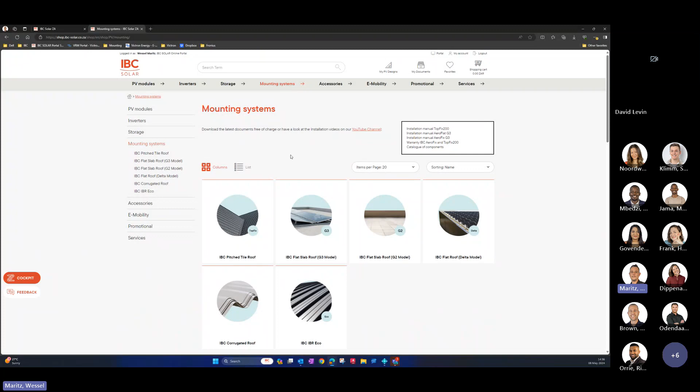So basically, once you log into the portal, you will be directed to the home page. If you go to the overview menu of the mounting systems and select it, it will display all the different types of mounting structures for the different types of roofs that we've got currently. In each separate category, everything is organized for what you need for that specific roof type.

So if we go into the tile roof section, for instance, it will show you all the various clamps that we've got, from the 30 mil up to the 35 mil clamps. We've also got our new end clamp range landing soon, which can go from 30 to 50 mil. Your G3 structure is the more premium range, if I can put it like that.

You will also see a new addition to our mounting structure range, the aluminium roof hooks that we introduced. This specific Mammoth SV Plus is for landscape orientation mounting on tile roofs, which I know you guys previously inquired about. On the second page you will find the stainless steel versions of these roof hooks.

Just want to go back to the corrugated to relate to what Alton said about the special we're running on this sheet adapter. Please note, if you use this sheet adapter, you would need the 120 mil Eco bracket that goes with it. This basically screws on top of that adapter. So with this, you can make a single layer or two-tier mounting structure on the corrugated roof.

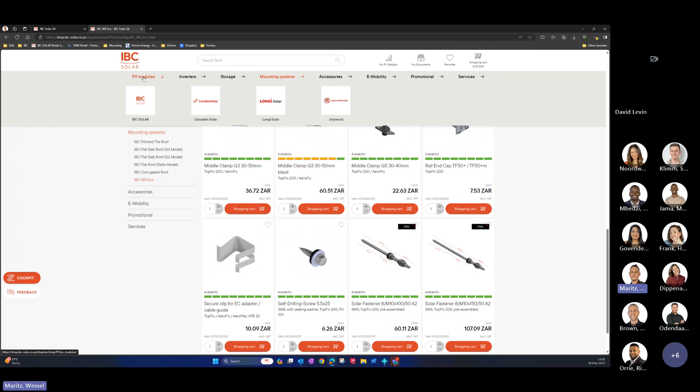Then just to head over to our panel side, we did recently also introduce Canadian Solar into our product portfolio. On your more premium black panels, that's exclusive to our IBC range. So on the Longi, Canadian, and Jollywood, we only do the silver frame modules. Black frames are only on our IBC modules.

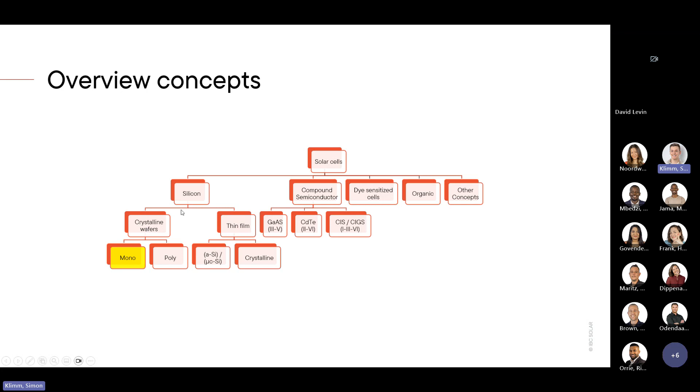What kind of manufacturers do we get? It doesn't matter which manufacturer it is, whether Jinko, Longi, or even manufacturers we have here in Germany, but mostly, more than 85%, are coming from China.

China is producing over 330 gigawatts, and there you can see they have a lot of force to keep the production of PV modules for all around the world. Longi is taking more than a quarter of all the manufacturing of PV modules. This was from 2021, but it's also up to date at the moment, so this hasn't changed a lot.

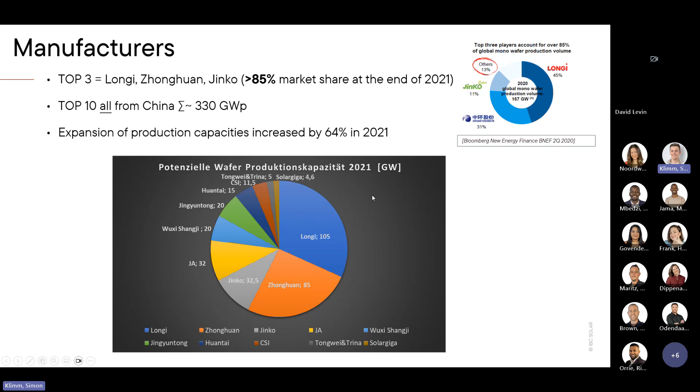This is getting a bit technical, but you don't have to remember every piece of information on this slide, just that you've seen or read it. We have 4 different types of cell concepts: the BSF type, the HJT type, the IBC type - which has nothing to do with IBC Solar, it's just called that - and the PERC type.

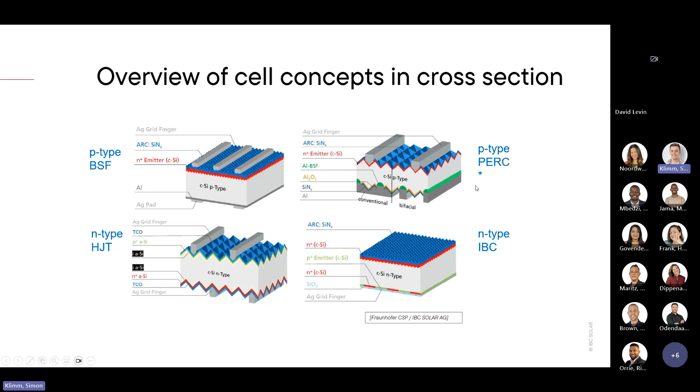PERC has been the most up-to-date concept until about 1 or 2 years ago, but what came after PERC is the TOPCon technology. The reason we use TOPCon is that it has increased efficiency, so it's now the new mainstream, as it's written here.

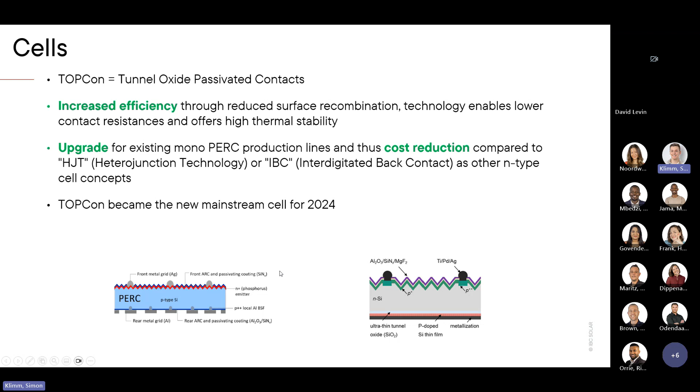With TOPCon you also get a cost reduction, but not to get too technical, just that you've heard it. Here at the bottom in the picture you can see the cross-section of a solar cell - less than 1 millimeter, really, really thin for a solar cell, and this has been the PERC type. But as I said, TOPCon technology is now up to date for most modules in the PV market.

What kind of layers does a PV module have? It's pretty nice to see. First, of course, you have the frame. As Wessel already said, it can be black or silver. IBC modules have, for example in South Africa, mostly black, but we also have silver variations, which here in Europe is also a bit cheaper, but as I said, it can be black or silver.

Then you have the glass. It's very important that the glass is as thin as possible, because you want all the sun energy coming through the glass and not going back. So this is really, really important.

After that, an encapsulant, and the main thing here are the solar cells - what I just showed you, with a cross section less than 1 millimeter, so really, really thin. On top of these solar cells you have the bus bars - you can always see these small silver stripes on solar cells, these are called the bus bars.

The solar cells are typically a full cell, but what is now already up to date, also in the IBC modules, is the half-cut technology. Half-cut means you just cut these cells in half and connect them with the bus bars. This has a reason: the efficiency of the modules is increased, and you get a few percent more efficiency from the PV module.

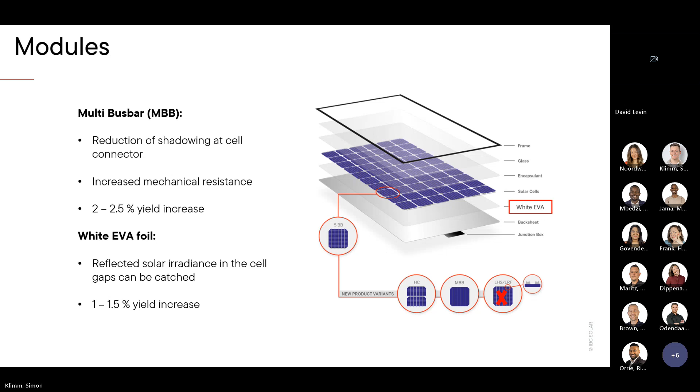This means the sun shining onto the module goes through all the layers, and if you have a white underground behind the module, the sun shines back onto the module and you get a bit more power, because you don't only have sun shining onto the top of the module, but also from the back. So this is the simple way to show how PV modules are manufactured and what the single layers of a PV module are.

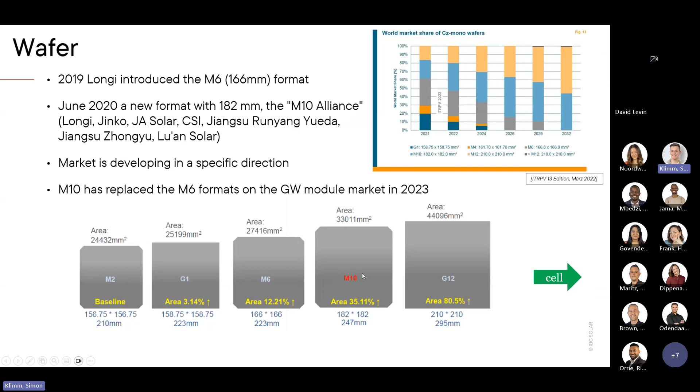The modules with the half-cut design have increased efficiency, and because if the modules bend, the whole solar cells could break. This is a big advantage you have with the half-cut technology. The modules bend and you don't lose efficiency because of the bending of the cells. So this is the most important advantage at this point.

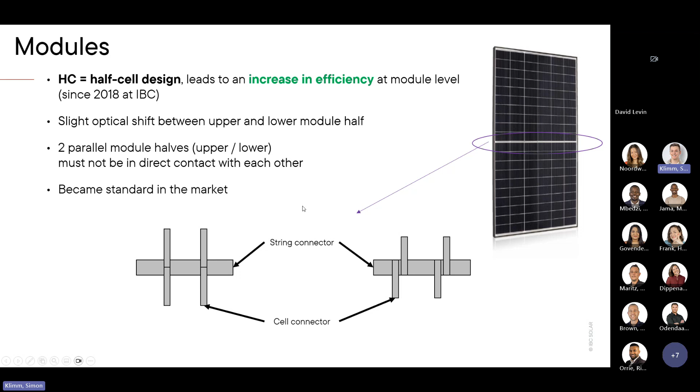If there's a shadow, the diodes switch so the current can flow through them. For example, with 3 diodes, the first 2 rows have 1 diode, the third and fourth row have 1 diode, and the fifth and sixth row have 1 diode. If there's shadowing in the sixth row, the diode gets activated and the current just flows through the first 4 rows, while that row gets skipped because the current flows over the diode. This protects the PV modules from further damage.

Coming to the half-cut design, you have 6 of these diodes located in the middle of the module - on the left you have an upper and lower part, in the middle you have 2 parts, and on the right side you have 2 parts, so 6 diodes total. If the shadowing is on the bottom right, only half the size would be skipped, and you get even more efficiency from the module. This is the big advantage you get from the half-cut design.

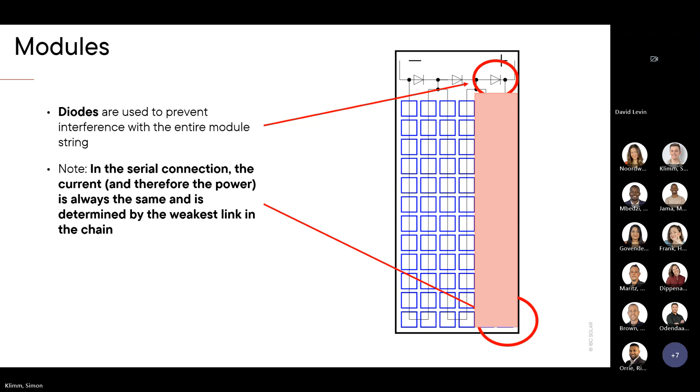These are also the design loads currently set for our PV modules, I think 1,600 pascals, meaning 1.6 kilonewtons per square meter. So you can see how these modules are tested and how these values aren't just calculated on paper - they're really tested practically, so we can say the PV modules have this quality and can withstand windstorms, snowstorms, and everything like that.

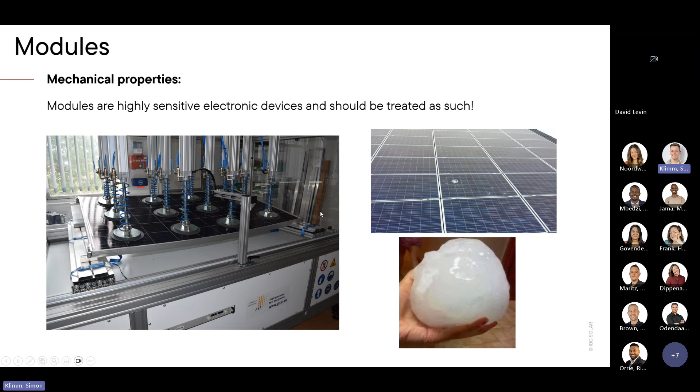What kind of variants can you get for modules, not just from IBC, but also from Longi or Canadian Solar? We have the standard white one with the white backsheet, we have the black ones with the black backsheet, and we have the bifacials. Bifacials have the glass in the front and also in the back, so you can increase the efficiency and get the energy from the back of the module when the sun is shining through it.

IBC Solar modules are around 400 to 420 watts. Canadian, Longi and Jolywood already have modules up to 550 watts, I think. This is because those modules have a higher surface area, over 2 square meters. Because of a regulation here in Germany, IBC Solar modules are not allowed to be over 2 square meters, so we can't use as many solar cells, and we only get 400 to 420 watts. In difference, Canadian Solar for example has modules over 2 square meters with more solar cells, so they get up to 550 watts.

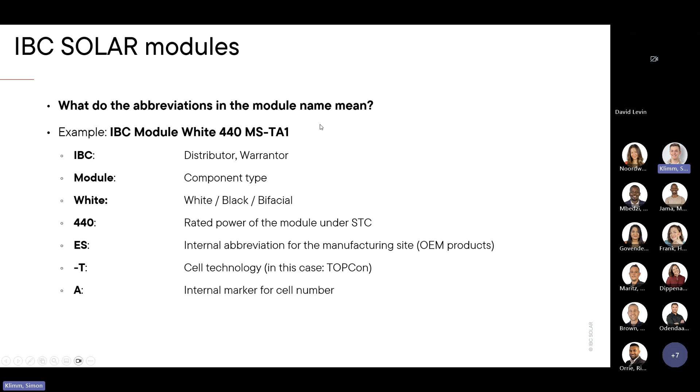What we also have is climate chambers, meaning the modules go in there, and for one hour you have, for example, minus 40 degrees, and in the next hour you have up to plus 70 or plus 80 degrees Celsius. So here the modules are also checked for climate differences.

And to confirm the rated power that you buy for the modules, for example a 440 watts module, this is tested here in a flasher, meaning there is a flashlight used for every module test all over the world, always the same flashlight. Then you can see, okay, the PV module gets a rated power of only 430 watts, or it gets the rated power of 440 watts. Then you can see the module is all right, it doesn't have damage, and you get the efficiency you also bought with your PV module.

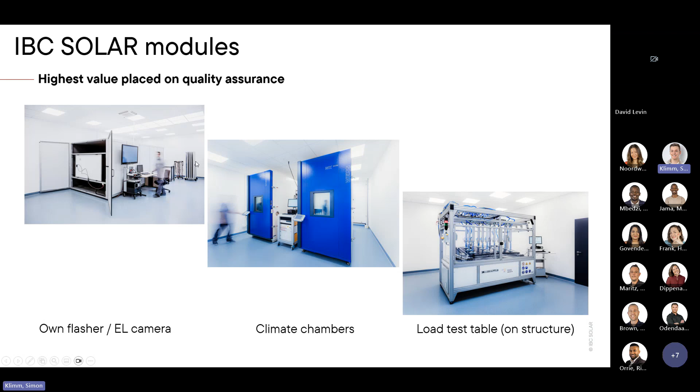So this was the first part about PV modules and cells. Is there any question left at the moment?

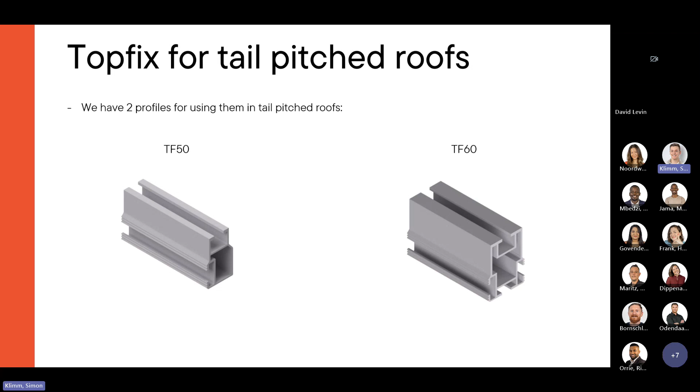Onto this connector you can just connect your profiles, and onto these profiles you mount your PV modules. Here you can take the TF50 profiles or the TF60, doesn't matter, just what you want to use. If you have higher loads - maybe South Africa is not the fitting example, but in Sweden or Finland, where we have a lot of projects with pretty high snow loads - then you can use the TF60 to get a few more values for the loads.

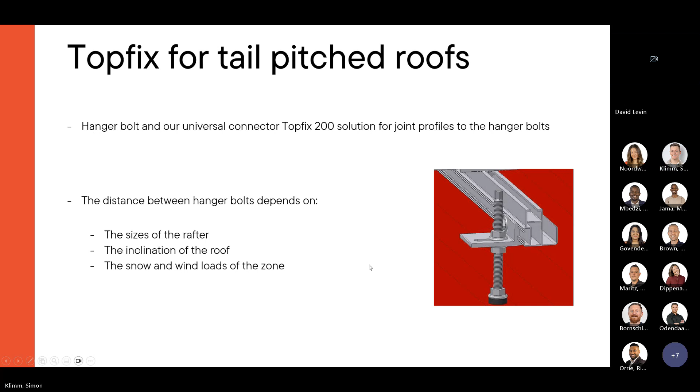How is this mounted onto the roof? We just saw a small picture, but here I think it's a bit more clear. You have here a tail roof, and as you can see on the bottom, you have the hanger bolt, which is connected through the tails to the rafter. Then you have the connection piece, and simply on that connection piece you can mount your profile, TF50 or TF60. On top of that, you just put your modules and fix them with the module clamps.

The same type of connection you can do with roof hooks. So for example, if you have typical tiles - not tails, but tiles - then you connect these roof hooks to the rafters as seen here, onto the rafter and the roof hook. Then you connect your profile, TF50 or TF60 again. So this is not a big difference. It just depends on if you can use a roof hook under the tiles, or if you have to screw the hanger bolts through the roof into the rafter. So these are the two options, simple as that.

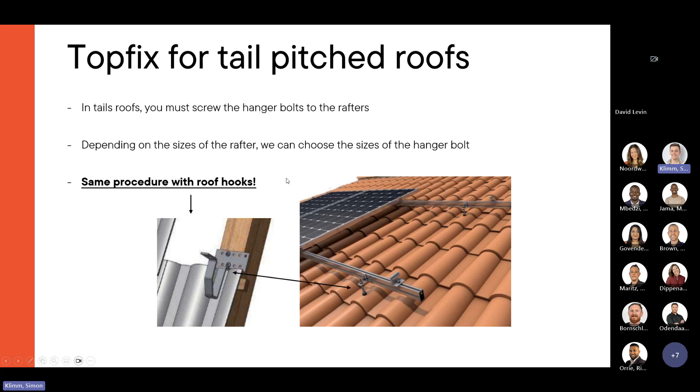Let's go on to the trapezoidal metal sheets. This is, in my opinion, the simplest and easiest system you can mount. It's the fastest one, and it's also, if you use the eco system, the cheapest one. But we will come to that in a few slides, also the corrugated adapter. As you can see here, we have the metal sheet clamps, which are connected or fixed to the metal sheet. Into this metal sheet clamp you just put your TF27 profile - called TF27 because it's 27 millimeters high.

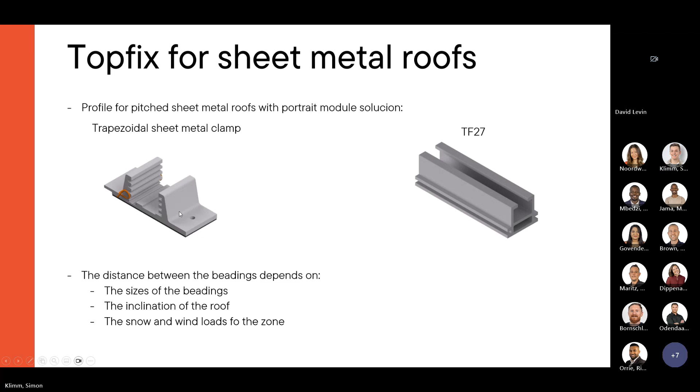In the next pictures it's a bit more clear how this should be mounted. So you have the metal sheet clamps - they have a type of glue at the bottom, so you can just stick it onto the metal sheet. You don't have to screw it in the beginning; you can just stick it to the roof and it stays there.

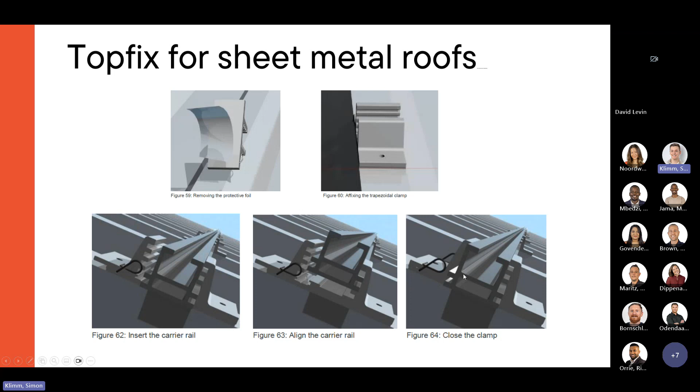When you have placed all your metal sheet clamps, like shown here on the left picture at the bottom, then you can put in the profile. It also depends on how straight the roof surface is. If you have differences of 1, 2, or 3 centimeters in height, you can select different heights for the profile into these metal sheet clamps. Once you've found the right height, just close the clamp. After closing the clamp, you can screw the metal sheet clamps into the metal sheet roof and everything is fixed.

I just skipped 2 slides, I'll go back so you can see how to mount these metal sheet clamps. We typically use an alternating mounting on the beadings, for a special reason. Here you have the metal sheet clamps, then one beading is free, then again you have one on the beading, one is free again, and so on.

This is because the force that comes from the PV system goes onto different beadings and doesn't always stay the same. For example, if you used the metal sheet clamps here, the next beading would be completely free, then you'd put 4 more clamps and the next one is again completely free. Then you would have double the load compared to an alternating mounting. This is why we typically mount these metal sheet clamps alternating, so the force from the PV system goes onto different beadings and they are not overloaded.

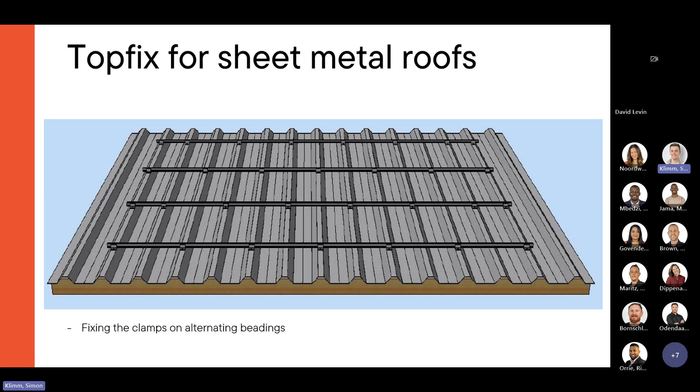This slide we already have. Once you've put in your profile, just screw 2 screws into the metal sheet clamps. What's also important is that we have a kind of locking clamps. Why do we have it? As you can see, the profile is not screwed into the roof or into the metal sheet clamps, it's just lying in there and clamped in these metal sheet clamps.

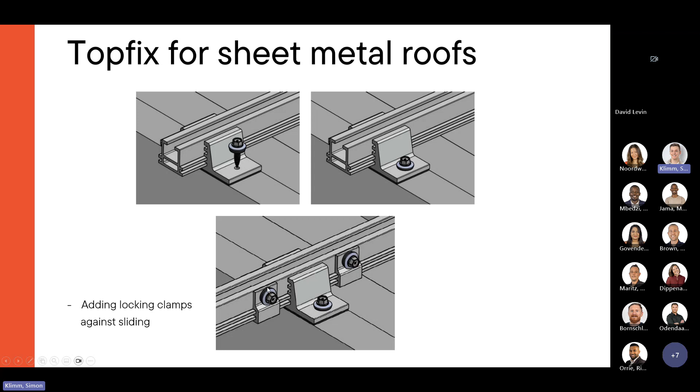But for example in South Africa, it's a bit different than here in Germany. If you have high temperatures of 30, 40 degrees or higher, the aluminium starts working, expanding a few millimeters or centimeters. If it expands, say 5 millimeters every day on a hot day, it can start traveling in one direction. To prevent that, we have these locking clamps you put into the profile on the left and right side. For every profile you use it once, or to be safe, you can use it twice per profile. You just screw it in, and then your profile is prevented from walking around to the left or right side because of high temperatures.

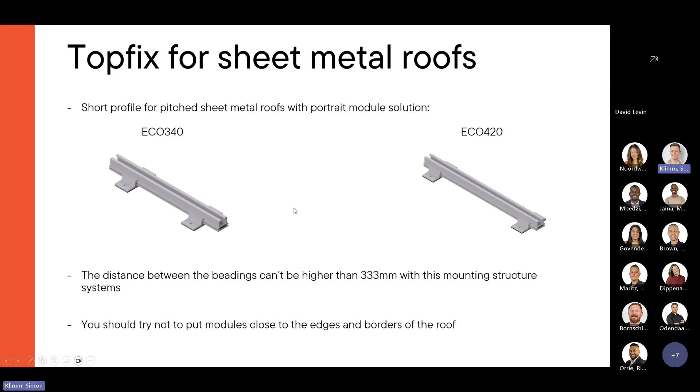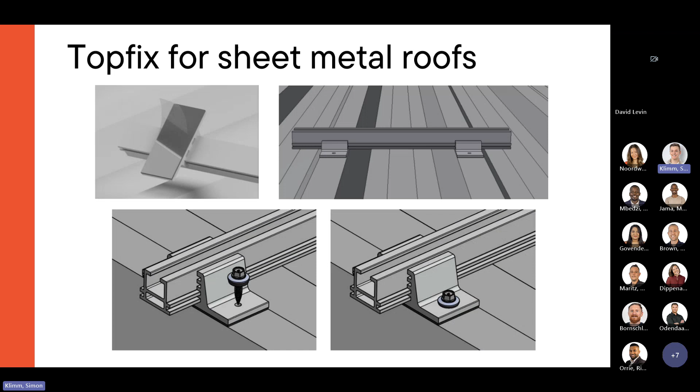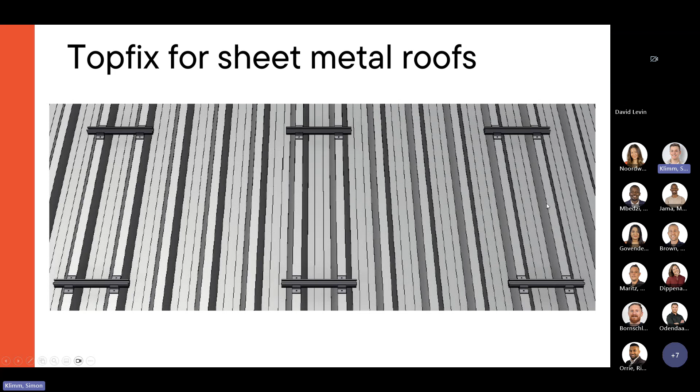Then we come to the eco systems. Here we have the first 2, the 340 millimeters and 420 millimeters. Why is it the eco solution? Because you can save a lot of profiles. You only have 2 metal sheet clamps and 1 type of profile, even at 340 or 420 millimeters. You just connect it to the roof, and like the mounting with normal profiles, you put them on the roof, and on top of that you put the modules. This has the big advantage that you have less material, and less material also means lower costs. So this is much cheaper than the normal metal sheet system.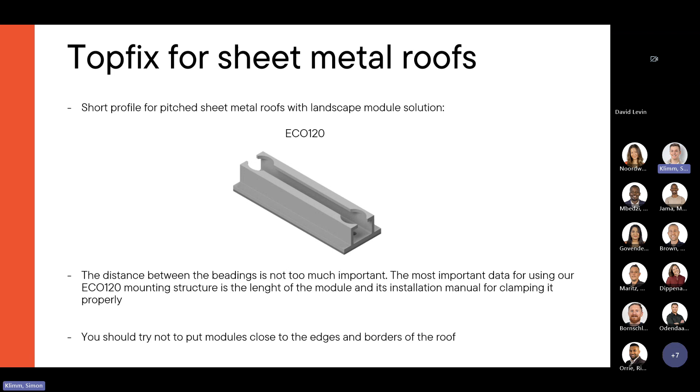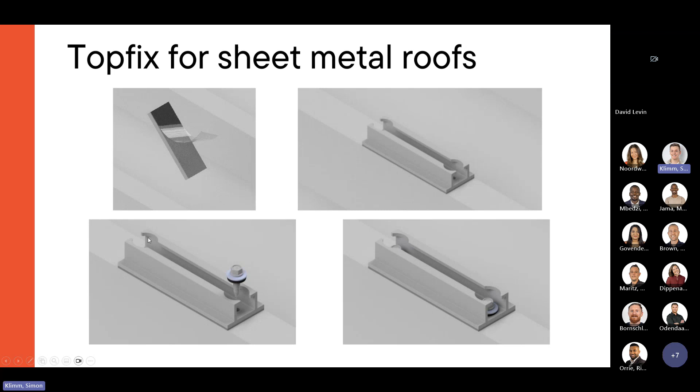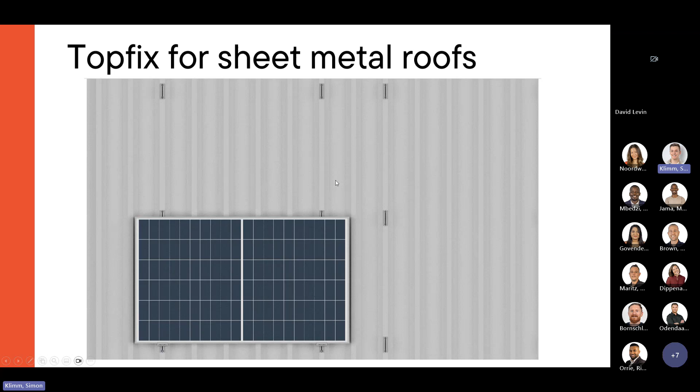What's even easier and cheaper is the Eco 120 system. This can be used in 2 different ways. For example, you have only the Eco 120 mounting clamps, you just put them onto the roof, screw it to the roof, and directly put the modules on it. This is really the easiest way to mount on metal sheets, because you save a lot of material, and this is the main reason why it's also the cheapest. But what you can also do with the eco sheets is use them for corrugated roofs. This is the adapter that Wes also showed us in the beginning.

For example, if you have a tiled roof, you can just connect the system with this corrugated metal sheet adapter. This adapter goes to the roof, and on top of that you connect this eco piece with 120 millimeters, and then you just place your modules on it.

As a difference to the mounting with hanger bolts on tiled roofs, first you save a lot of time, and it's much easier to mount. For hanger bolts, you first have to screw a hole through the tiles, then screw the hanger bolts into the rafters or your metal subconstruction, and then connect your universal pieces or connectors. But then they also have to have the same height on every hanger bolt, and this takes a lot of time.

If you want it much faster, you can use this adapter, just connect it to the roof, put the eco system onto it, screw it into the roof, and then place the modules onto this eco piece. As I said, for tiled roofs this is the easiest and cheapest way to mount a PV system. Just keep that in mind.

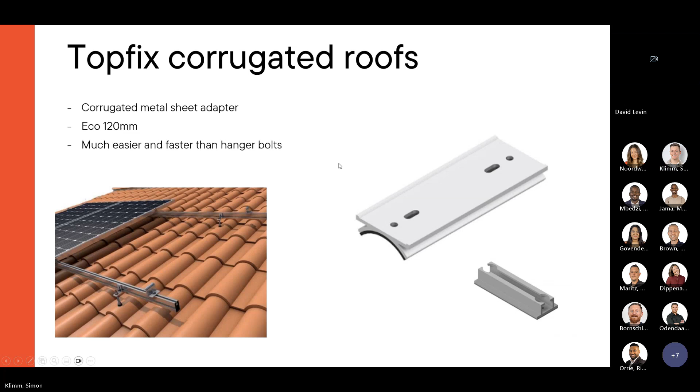At the end, we have different systems for our flat roofs. Most of you have already seen different flat roof systems with an inclination for the PV modules. You can have it in one direction, called our south system, in 8, 10, or 15 degrees, or you can have the east-west system, also in 8, 10, or 15 degrees.

As you can see, on the south system the modules all have the same orientation, while on the east-west system you have two different orientations, and you can get the energy over the whole day without having this energy peak at maybe 12 o'clock noon, like here on the south system.

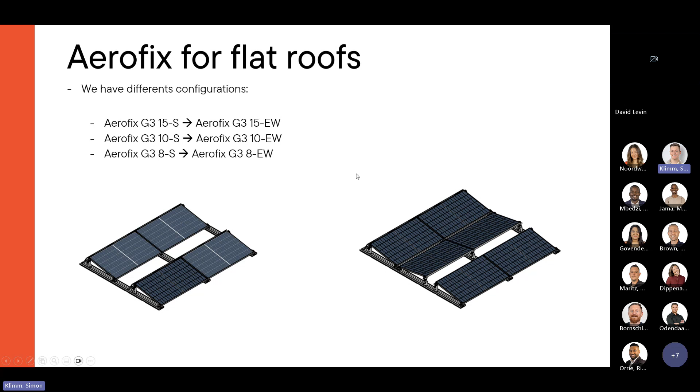What do you have to know if you use these kinds of systems? It's written in the mounting manuals that at least you have to use 2x3 or 3x2 modules. This is the small picture here on the left side, where we have 2x3 modules.

This is the smallest group of modules you can have, because you have to put ballasting onto the Aerofix system. If you only have 6 modules, the whole system has its own weight that is really low, so you have to put much ballast on it. In difference, if you have the biggest possible module array of 20 by 20 meters, the whole array has its own weight so high that you don't have to ballast anything most of the time. Maybe on the edges or in the corner areas, but in the middle you don't have to ballast anything, because the array is already so heavy that even windstorms can't move the system. So keep that in mind: the smaller your module array is, the more ballast you have to put on it.

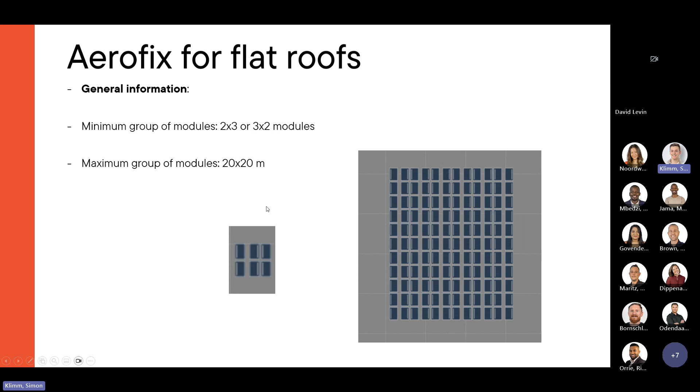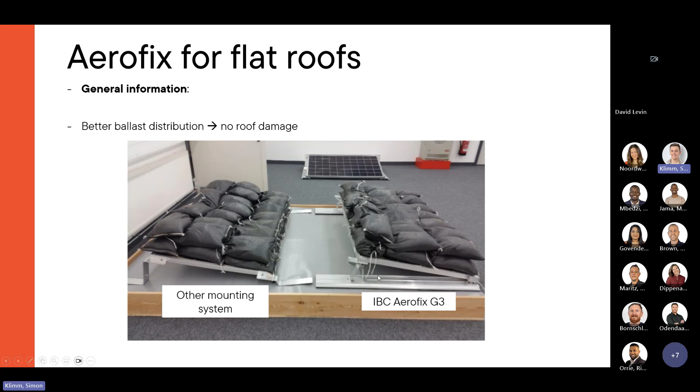If you put the force over the whole area of the base rail, then you don't have high-value points where all the pressure from the PV system goes into the roof, like you can see here. These are just simple points, and all the pressure from the weight goes into 1 or 4 points per module. This is the main reason why we have this kind of thick base rails.

Here you can also see it, especially on foil roofs or pretty soft roofs. You can see extremely well that these base rails spread the force over the whole area of the base rail. If you only have point contacts where the PV system touches the roof, you can damage it, and in the worst case you can get water into your roof. This is, I think, the last thing you want to happen to your roof system.

You can also connect these base rails, should be pretty clear. We have the normal base rails and the eco rails. Here on the bottom, you can see this is the whole base rail, and the ecosystem ends here next to the screw. So the ecosystem just ends here next to the screw, which means you have much less material.

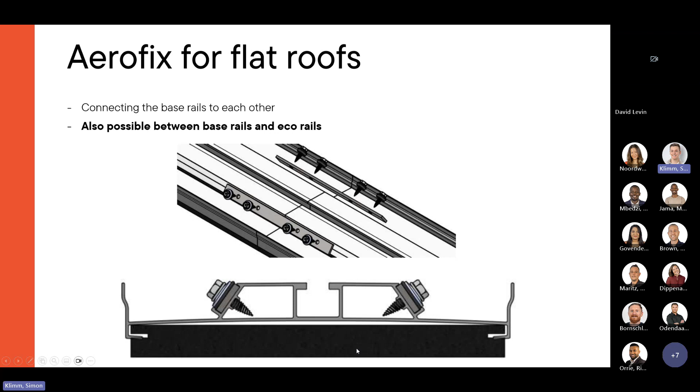And so the eco system, as the name already says, is also much cheaper. So this is the only difference: normal base rails have the full size, while eco rails have less material and a smaller size.

How are the modules mounted onto these base rails? We have bottom and top supports. For the bottom support, you can have the single one, for example at the end of the module array, or for the south system or east-west system where you always have 2 modules next to each other. Then we have the double support, which is just one piece you connect, and it's also easier to mount than if you have to mount 2 of these supports.

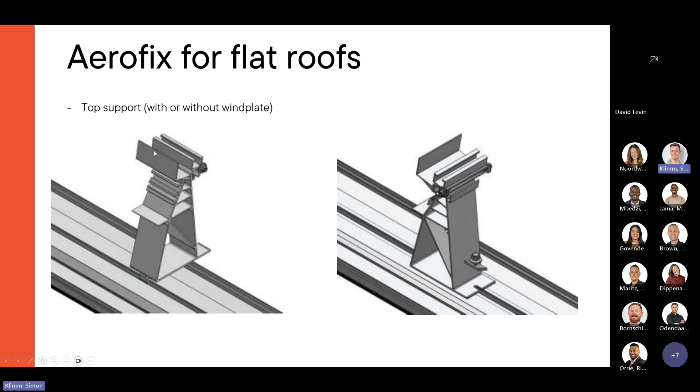Then you have the top support for the module, and there you have 2 different types. Here you can see the typical top support without a wind plate mounting. If you want to mount a wind plate on it, like in the south system, you can see it here in this picture. This is a top support where you have a bit of material where you can mount the wind plate between the base rail and the top support.

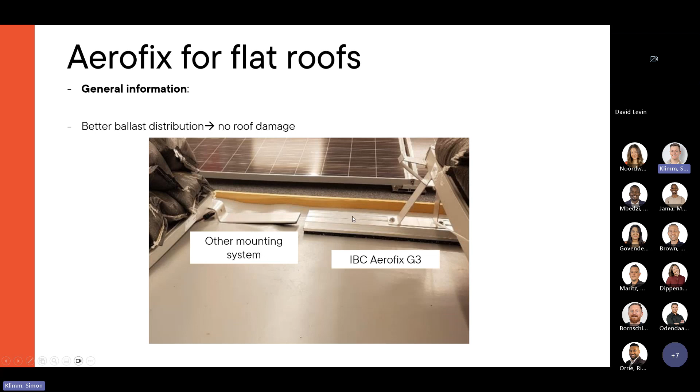For the last slide, as I said, our aerofix system is an aerodynamic system, meaning it is not connected onto the roof. But if you have high wind loads, or pretty high buildings with roofs over 30 or 40 meters high, then in most cases you have to ballast it.

And if you have flat stones, we have these L profiles where you can put the flat stones in. Depending on their size, you mount your first L profile, put the stone in it, and once you know the size, you mount the other L profile and you're fine. So these are the 3 ballasting options, and what's best for your roof depends on how much ballasting you need.

The easiest way is to create a building in the PV Manager, our typical calculating program, where we also create most of the buildings and then look at what materials you need, because you get a full parts list at the end. And if everything is fine with what you've created, you also get a statical report, so the statics are approved for that building.

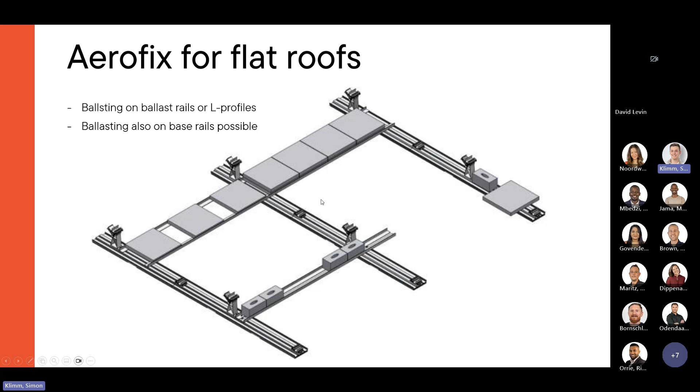This is just from our side. We always use the PV Manager because then you don't have to calculate it yourself manually, and it makes everything for you. It's the fastest way. And yeah, I think this was the last slide from my side about the mounting system.

I hope I've cleared up every question you have. If not, just feel free, write it in the chat, talk to us as you want. And if not, I already say thank you for the attention, and I hope you could get a few more informations about the two presentations about modules and mounting systems. That's all from my side. Thank you.